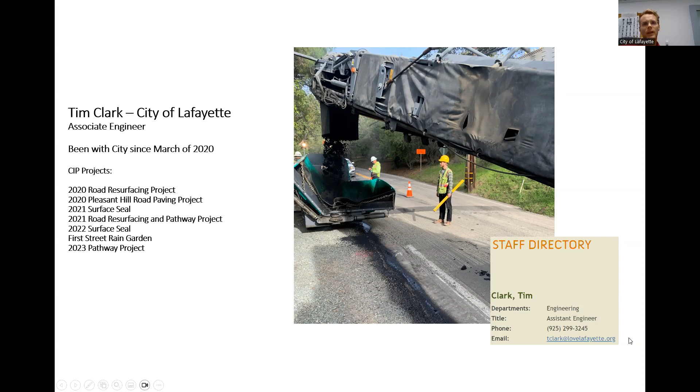And then I'll hand it over to Anna, who's also managing the project. Hello everyone, this is Anna Bernard. I'm the city engineer for the city of Lafayette. I've been here for about almost 2 years now. So my projects that I've done here is the 2023 paving project that repaved Glenside and Olympic Boulevard. And also we got involved in the Lafayette Library and Learning Center, the children's activity deck. It was a remodeling on the deck and the library.

So for the 2024 road repaving project, like I said, 5 streets. Right now we have the 75% draft plans. What we have in these plans is subject to change depending on how the estimate shakes out in the end, and also upon bid opening. If we open the bid and it's over budget, we might need to cut some things. So these aren't set in stone yet, but if you do have any questions or concerns, it's good to bring them up now while everything's still on paper and not when the contractor's in the field. So please feel free to contact Anna or I if you have any questions.

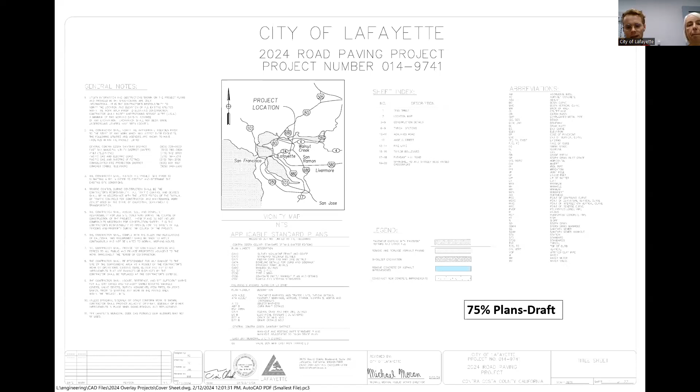So we're going to be overlaying 5 streets, like I said, with about 2.5 inches of asphalt. And before any of that goes down, we need to do prep work for it. So that involves removing striping. Here we erased off this fog line and also this turn arrow right here. So we do this in order to make sure the new layer sticks well to the old layer. If you try and overlay over any paint and stuff, it doesn't stick well.

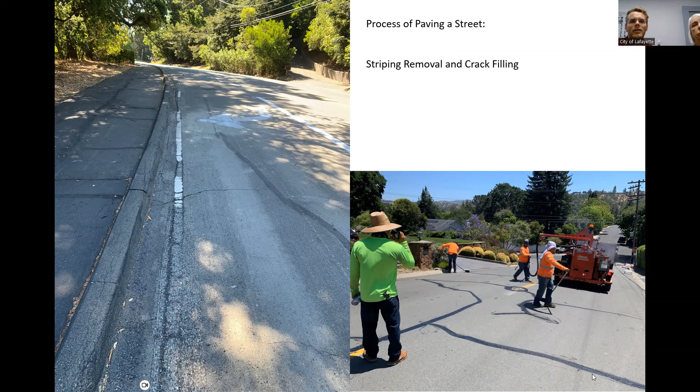Here's the crack sealing guys down in the lower right corner, they're filling in any finer cracks in the pavement. Next up, we have dig out repairs. This is the next step in the process before you overlay. So this gets rid of, you grind out and take out any of those really busted up, loose looking chunks of asphalt. On the left is a grinder, just milling 6 inches down of some pavement, and on the right is where we plugged it up with asphalt.

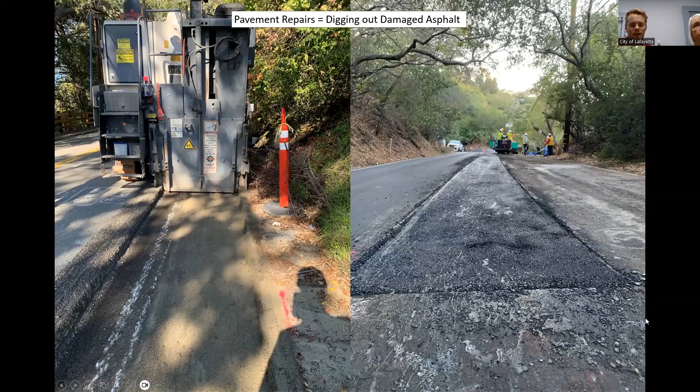And then after that is the overlay process. Before you overlay, you spray down a light coat of oil, something really sticky called a tack coat. Then you can put on the really hot asphalt on top of there. There are 2 methods. One involves dumping a big truck into the paver, and the paver kind of goes. Another uses this pickup machine. It's kind of like an anteater where trucks belly dump in a windrow, and it gets picked up by the pickup machine and fed into this paver back here, and you can kind of keep going all day.

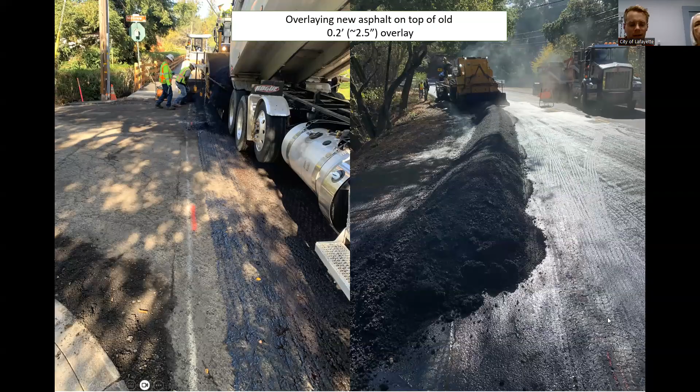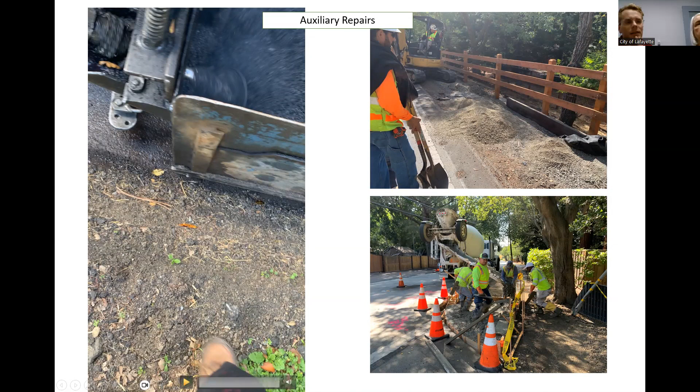So before the paving process, though, there might be some auxiliary repairs that we have to do. On the bottom right, they're fixing up a curb ramp here, bringing that up to ADA standards. On the right, we had to remove and replace a fence. And once the overlay goes down, that new 2.5 inches of asphalt, we can put the berm on top.

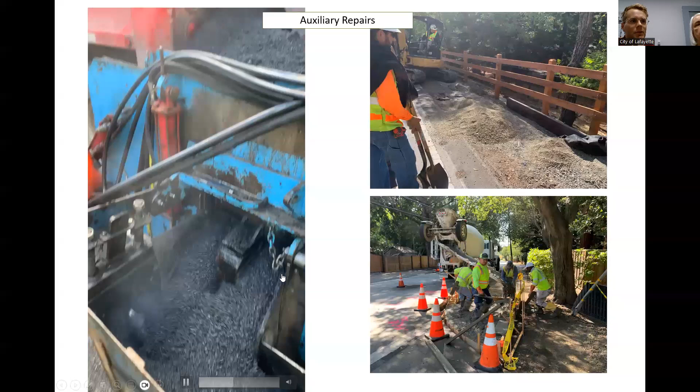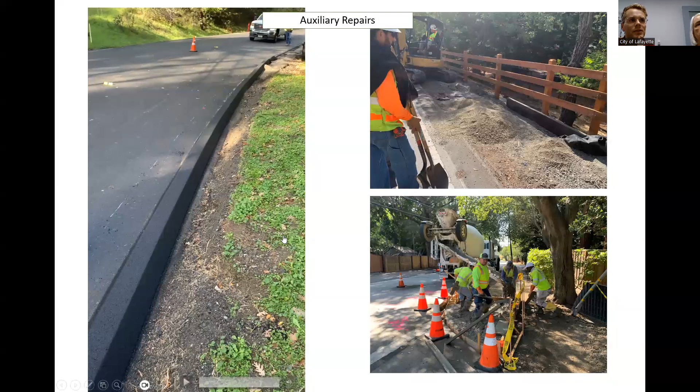You can kind of see the machine taking the asphalt, shaping it, and then squeezing out the new berms. You probably see these on the sides of the roads in Lafayette all the time.

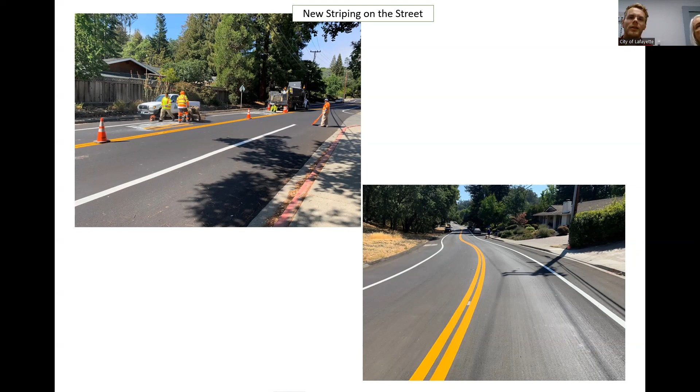After that, it's kind of like punch list items and stuff before the contractor wraps up the project. So you can see all these different steps that need to get done in order for a street to be repaved. It does take a few months in multiple locations to do all this work, so please bear with us during the construction season.

First up on the list is Acalanes Road. We're repaving this from Black Forest Court, where we stopped with the 2020 overlay, and we're going to go paving all the way up the hill to the city limits.

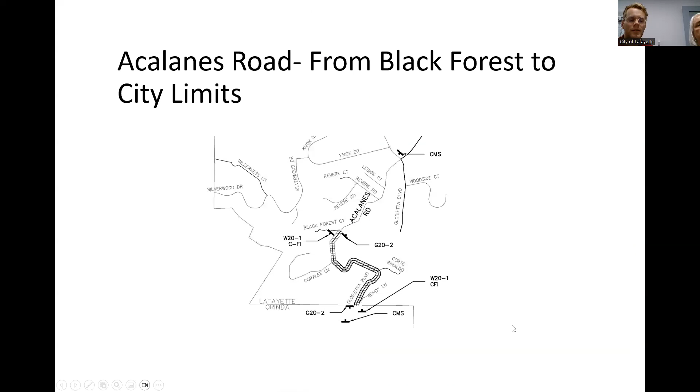The first thing I noticed walking on Acalanes Road was that the pathway on the northbound downhill side of the road was in need of some repair. So we're going to be fixing up this asphalt. Right on the plans now, we have it removing and replacing some of the asphalt behind the guardrail, and we're also going to be fixing up this fence as well.

We're also going to be replacing the guardrail along the pathway and the three other sites on Acalanes Road. This guardrail is not Caltrans compliant right now, so we're going to bring it up to standards. On the right is a picture of the pathway just uphill of that guardrail section on the left.

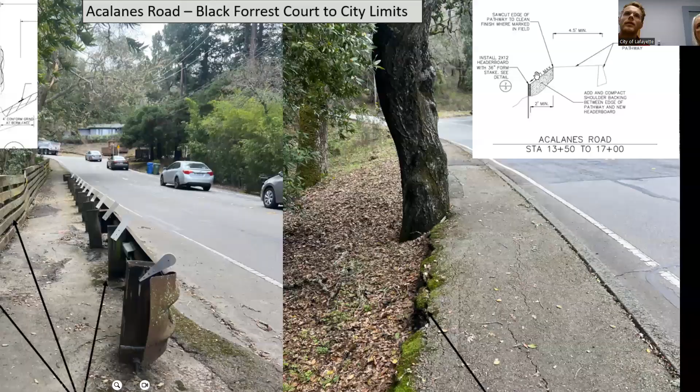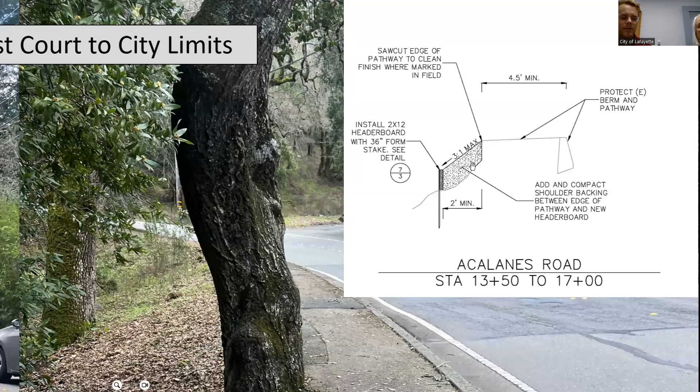If you notice, the edge is kind of flaking off right there. So in order to stabilize the pathway, we're going to put in a 2x12 header board on the left-hand side. There's a little detail page up at the top right, let me zoom in there. We're going to put a header board and shoulder backing between the pathway and the header board to reinforce it, then saw cut the edge of the pathway to a clean, neat finish. So while it's not going to look like a new pathway, it should give it more life.

On the left is some guardrail. This is another section that's going to be removed and replaced and brought up to standards. Right now it's too low. We want the top of it to be 31 inches above the asphalt pavement.

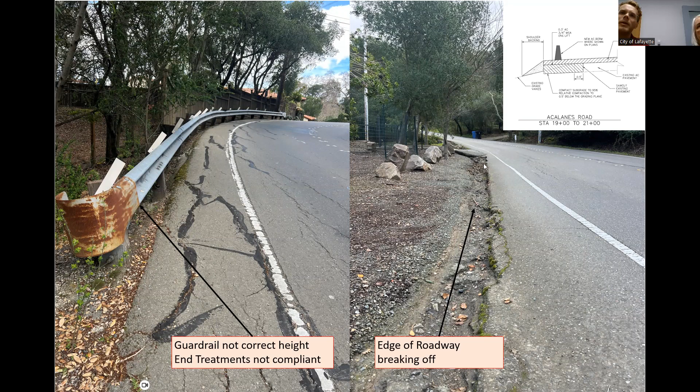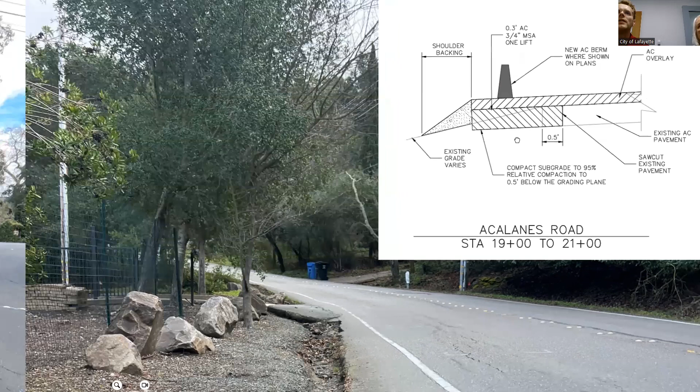On the right is the road widening we're planning on doing. There's a kind of trough developing on the side of the road, which is taking off some of the edge of the roadway. What we want to do is widen out the asphalt section right there. You can see this is about the edge of the existing pavement. We're going to go out around 2 feet wider and put a new berm, that new asphalt curb, on the edge of the roadway to collect any water that accumulates, so it'll stop eroding our edge of road.

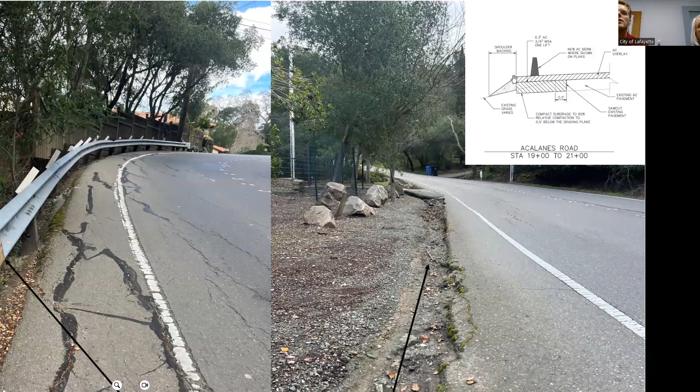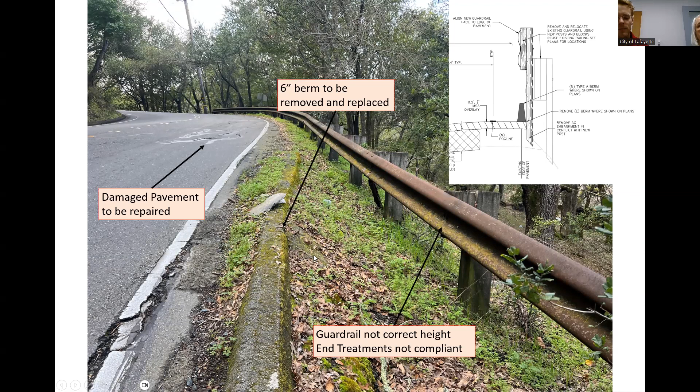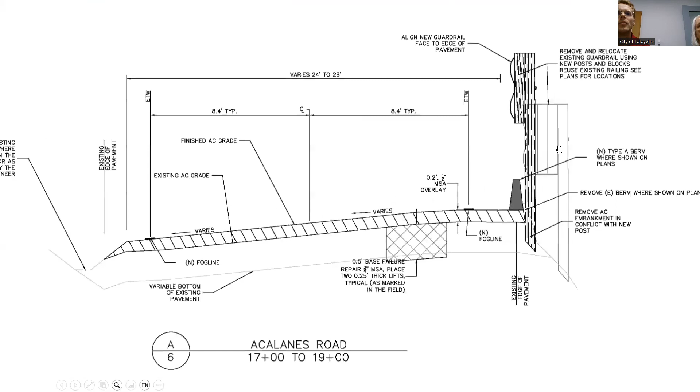So here's a cross section. All these details I kind of showed on the previous slide: some road widening, and what we're going to do with the pathway with the header board right there. Going up here, we're going to move that existing guardrail over to the edge of the pavement. And going down here, if you look on the left side of the page, this is what we're going to do with the pathway. We're going to try and rip out the old fence and put in a new fence, and also put in a new guardrail.

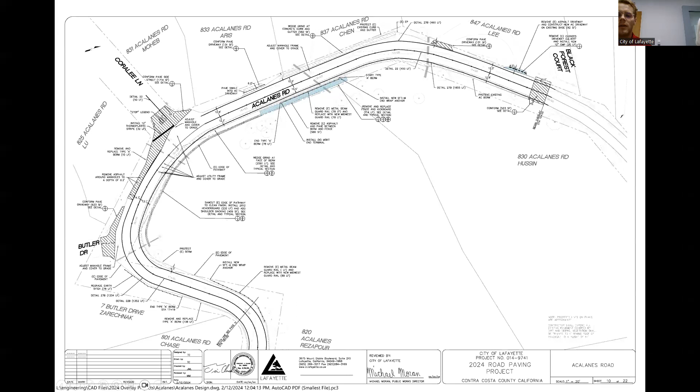So looking at the plan sheet, starting at Black Forest Court, going up the hill, like I said before, we're going to be fixing the pathway. We're going to be removing the fence, putting that back, then stabilizing the edge of the pathway right here.

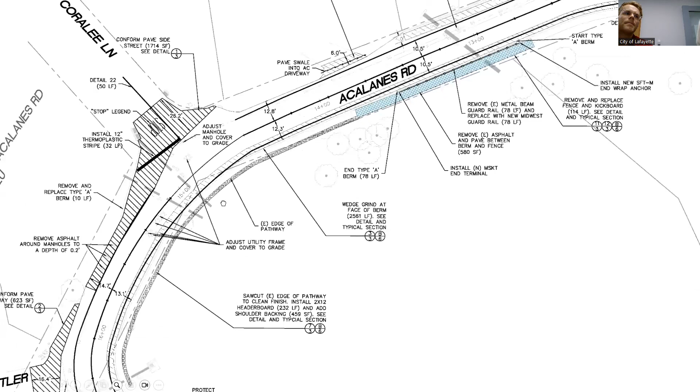Going further up the hill, we're going to be carving out more of a ditch on this curve right here. Right now it's kind of filled in with earth, so we want to make sure water keeps on that side of the road where it's supposed to. We're also going to be replacing this section of guardrail right here near 820 Acalanes.

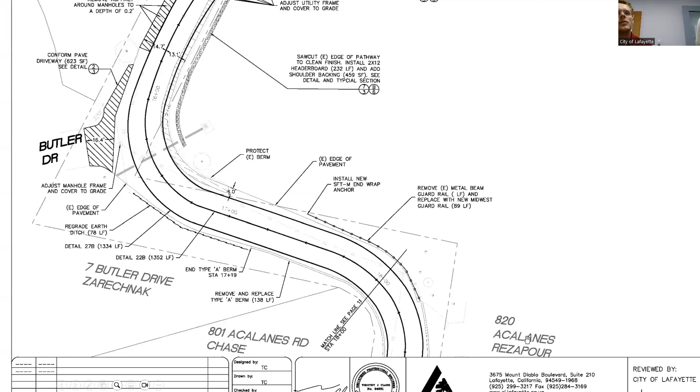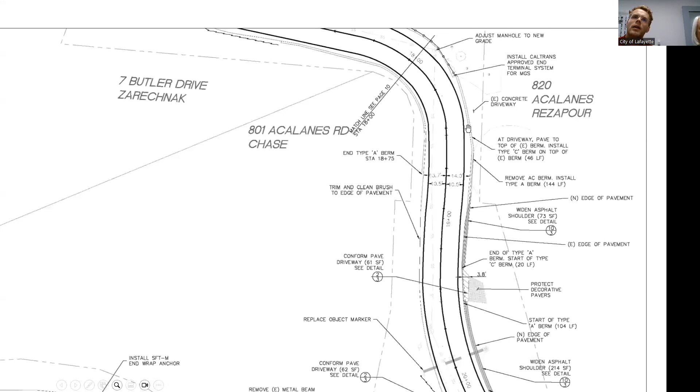Just past 820 Acalanes, we're going to be doing some road widening and putting in a berm all along the side of the road up until the existing guardrail. We're going to be replacing this guardrail. We're also going to be widening the lanes right here, because having too narrow of lanes allows people to cross the line willy-nilly. So we want to give people enough space to make this really sharp turn.

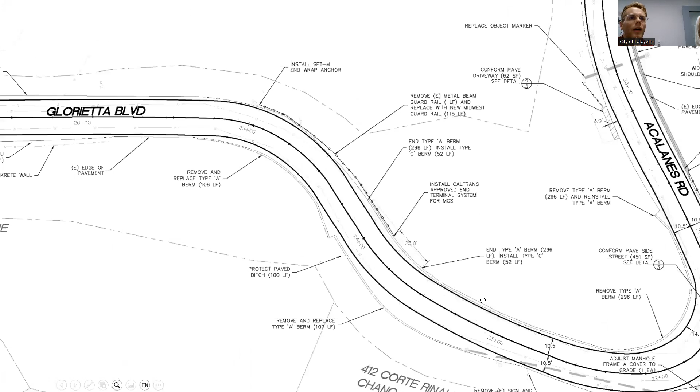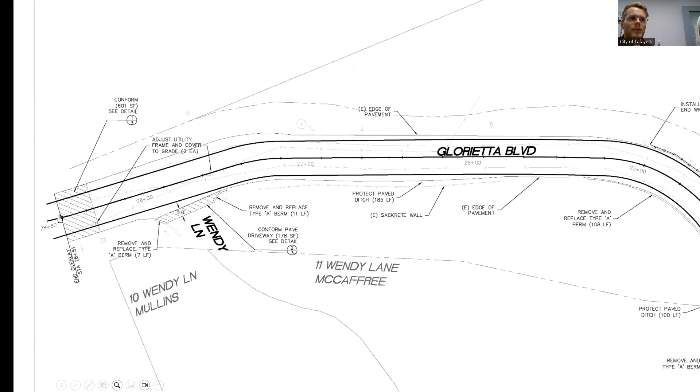Going up the road further, we're going to be replacing this section of guardrail as well, and we're going to be repaving. We're going to put in 2.5 inches of asphalt on all of Acalanes all the way up to the city limits, which is just past Wendy Lane.

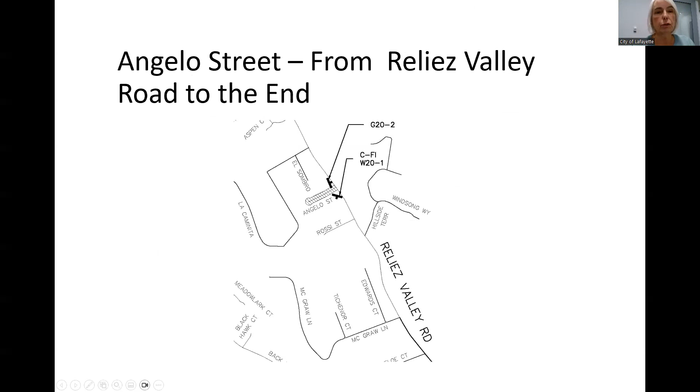All right, now for Angelo Street. Okay, everyone, so Angelo Street, it's a street that's a dead end off of Reliez Valley Road. So we are doing the repaving of the entire street.

When we looked into what kind of treatment we're going to do, we discovered that the existing asphalt pavement was in a stage of deterioration and cracking that needed more than just a dig out and overlay. So the proposed work is to grind and inlay 3 inches of the existing pavement.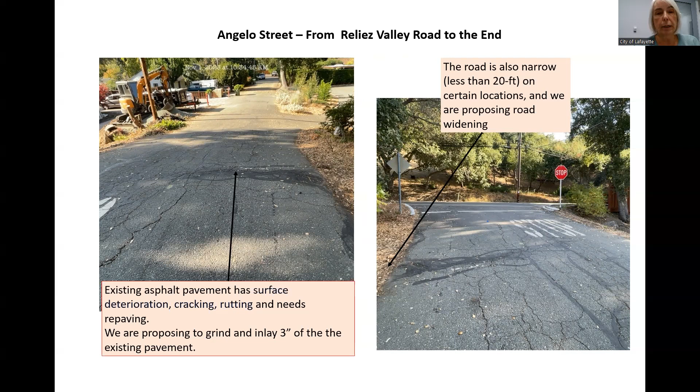Also, we noticed that the street is fairly narrow at the beginning, off of Reliez Valley Road, so we're going to do some road widening in this area here. This is the plan that we're developing, and you have seen the 75% plans.

So we are grinding entirely this area, which goes right now to the existing edge of the pavement. We are widening the road about this area here at the beginning of the road. We're going to widen about 18 inches on this, and that will allow the road to become a 20-foot wide portion.

Once we install the inlay asphalt, we will retouch the stop marking and the crosswalk. Our limits of the work are at the edge of that crosswalk. We are not doing that because this was done recently, so that will be our conform edge there.

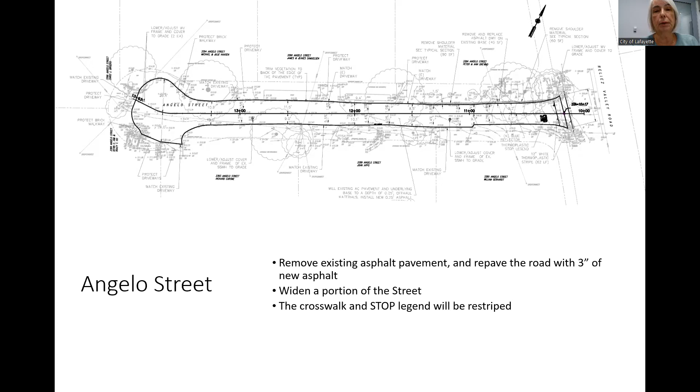So when the grinding machine comes and grinds the street, we protect the edge of the existing driveways. And the inlay is done, probably, I imagine, in one day.

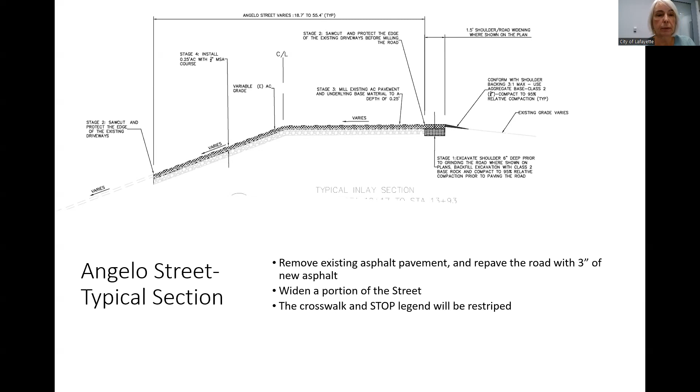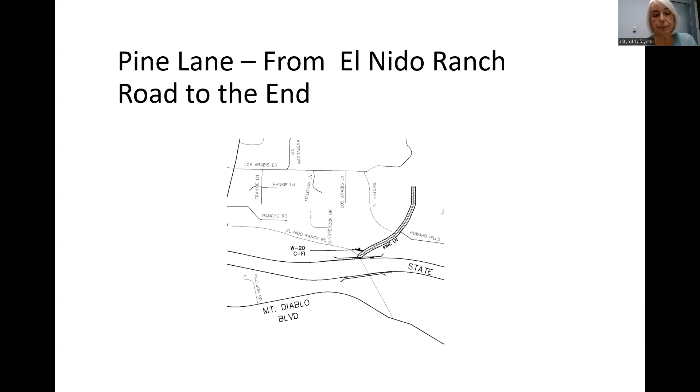So Pine Lane is another street that I've been working on with the team, and the area of repaving goes from El Nido Ranch all the way to its end. On Pine Lane, the asphalt wasn't as bad as Angelo Street.

So we are going to propose to wedge grind the east side of the road, and then install a 2-inch overlay in its entire width, from edge to edge. We also noticed that the El Nido Ranch cross curb ramps didn't comply with the latest ADA requirements.

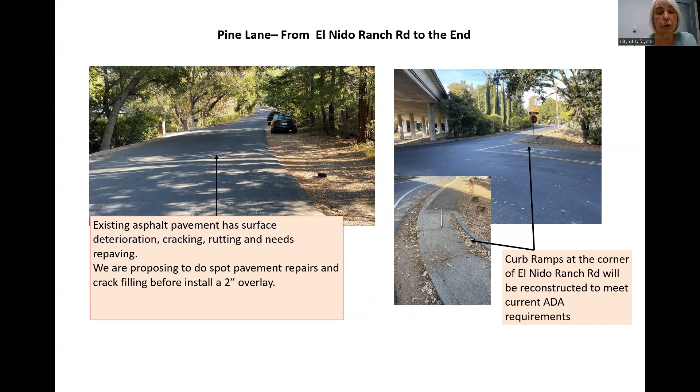So we are going to completely remove and replace this, and bring in new curb ramps that comply with the new standards. By doing the wedge grinding on the east side, we preserve most of the elevations, and the conforms meet all these driveways on the east side.

But when we overlay the rest of the street on the west side, some of the driveways will have to have a portion removed, and then we provide a smooth transition to the existing improvements. Unfortunately, some of these driveways go right against the existing edge.

So we are proposing to take about 2 feet of these ends here, and then do a transition from the final conform elevation to the existing driveway.

We will have a note and requirements for the contractor to do a clean cut on concrete, pavers, or bricks. So in the final product, it will look like the existing improvements go right against the asphalt, a nice clean finish.

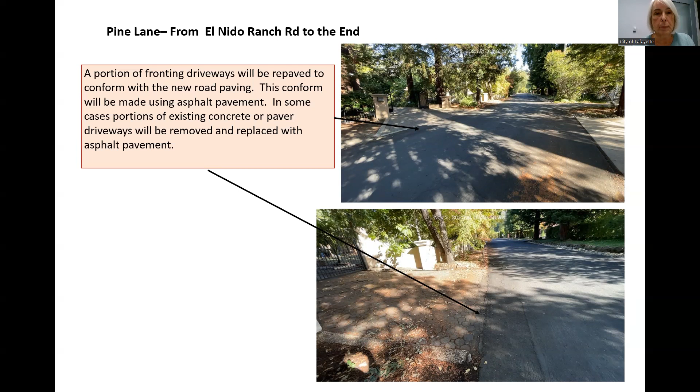Okay, all right, so here's our plan development. When we're talking about wedge grind, we're going to grind the entire end of the road about 8 feet wide, and this goes all the way to the end.

At Timothy Lane, we will have to do a transitional grinding here, shown in this hatch area. So we also have to do some grinding and then conform pavement on Howard Hills Road.

As part of this project, we will also do some of this. The water runs the entire length of the street on the east side, and it goes into a series of existing pipelines, under concrete driveways. But we noticed that in certain locations there is a flattening and sinking of the area alongside the road, which will create some issues. We're asking the contractor to regrade and recreate the ditch along the side of the road.

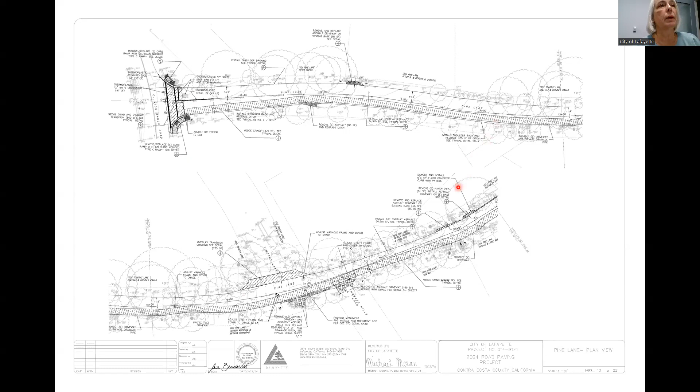In our next slide, we have the continuation of Pine Lane, and you can see some of what I mentioned, improvements that will have to be cut back and then transitioned into the asphalt. So you can see some of these driveways here.

So those have to be put back with asphalt? It has to be put back with asphalt. So if you have a brick driveway, a concrete driveway, or a paver-finished driveway, we will cut a piece of that driveway, and then conform it with asphalt.

At the end of the street, we have 3 driveways that meet in this location. So we decided to do a full grinding here, and then conform with the existing elevations as a finish of the road. So this is some of the new curb ramps that we're proposing.

That's done in the northwest corner of El Nido Ranch, and this is the northeast. This is a curb ramp that we are applying for a permit with Caltrans because it's under the freeway.

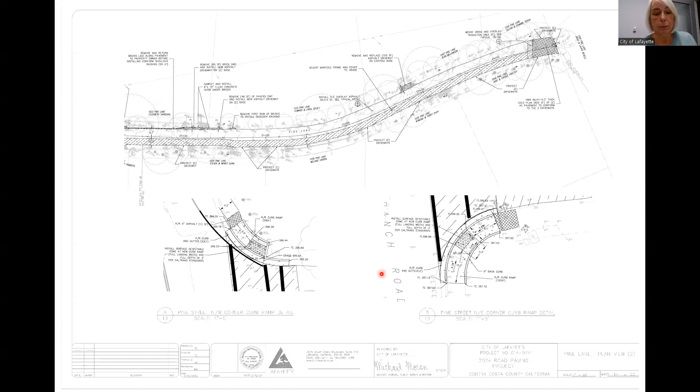We're going to do some big dig outs and take out 6 inches and then put it back in asphalt before we grind with the wedge grind and apply the 2 inch overlay over the entire road.

Also, you'll notice with the wedge grind, the reason we decided to do this is because we would not impact the existing pipelines installed there, and some of the concrete that runs over these pipelines.

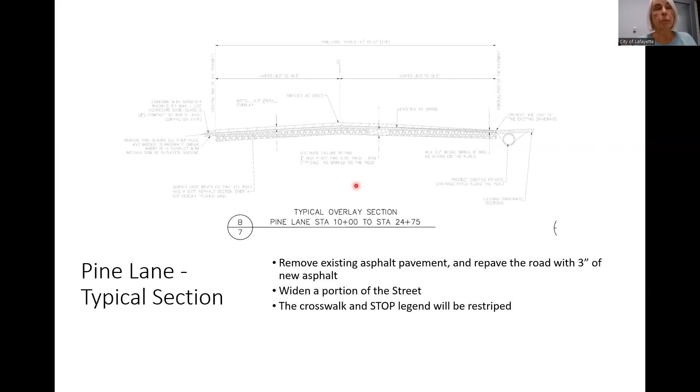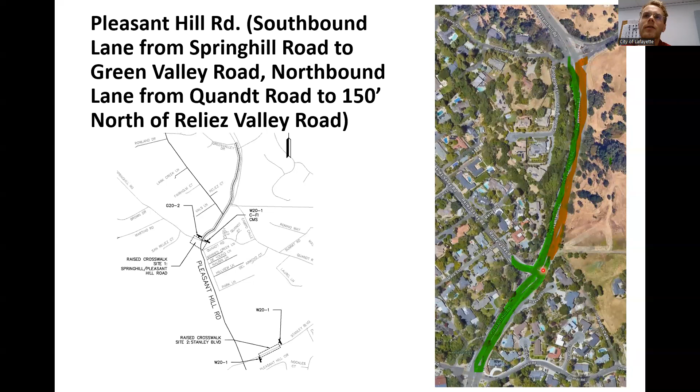And then we're going to keep on paving both sides of Pleasant Hill Road up until Quandt or Springhill. We're not going to pave into this intersection or past it. So this is our paving limits for the Pleasant Hill Road section of the project.

So on one section, this is the Green Valley intersection on Pleasant Hill Road. We have an existing guardrail that we need to raise. Also, from Green Valley down to Reliez Valley Road in the southbound direction, the bike lane there is pretty jacked up. The berm is kind of peeling from the edge of the asphalt, and there are a lot of large cracks.

This is because there's a very steep bank right here, and it's slowly creeping into the creek. So we are going to do extensive dig outs in this area, but we're going to do our best to fix the problem. This is a recurring issue though, because this hillside is slowly slipping.

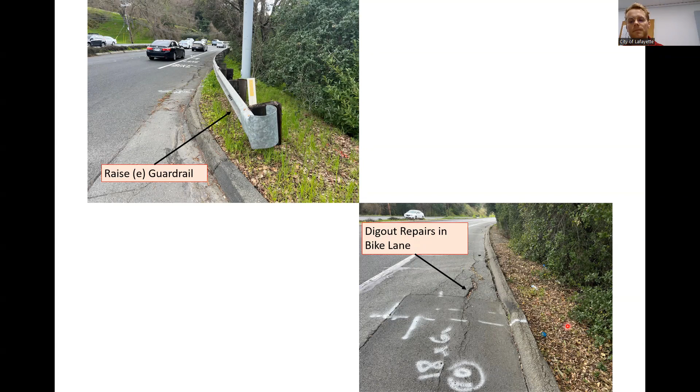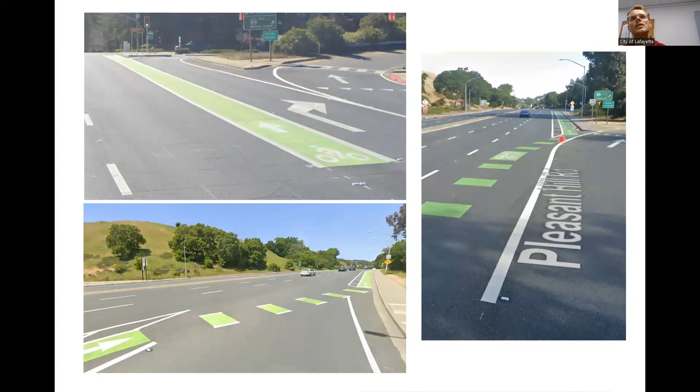We're going to be installing some green bike lane markings on Pleasant Hill Road to make it more visible to cars that this is a bike lane with bikers along the street. This is the southern section from Deer Hill to Mount Diablo Road, which we did a couple years ago. It won't look as extensively green as that, but there will be some green.

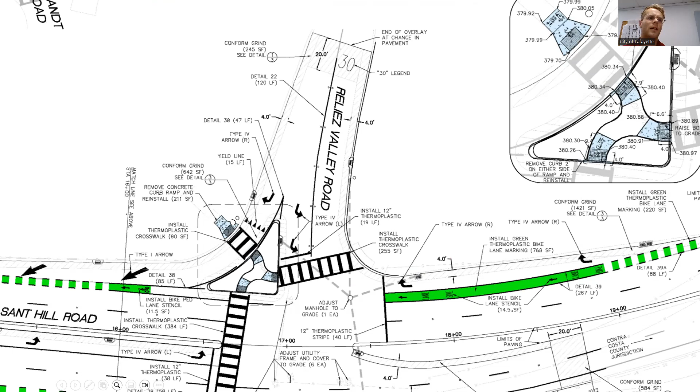Here are the preliminary plans. We're still deciding how we want to stripe the bike lanes, but starting at the Spring Hill Road intersection, we're going to put in a green bike lane all along there, going all the way to Reliez Valley Road. We're also trying to make these ramps ADA compliant. So far the plans have us removing the concrete and readjusting the ramps, but if we can glue down domes instead, we could do that to make them ADA compliant.

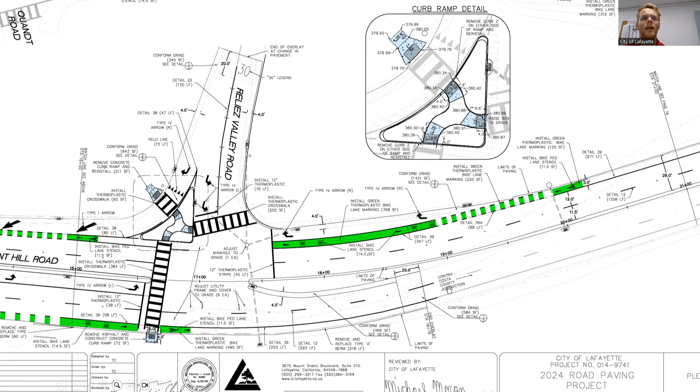We're also replacing one on the south section of the roadway. Going further up the hill, the northbound lane is Contra Costa County, so we're not going to repave past this line. In the southbound lane going further up the hill, though, we are going to be repaving that section, with more bike lane coloring shown here.

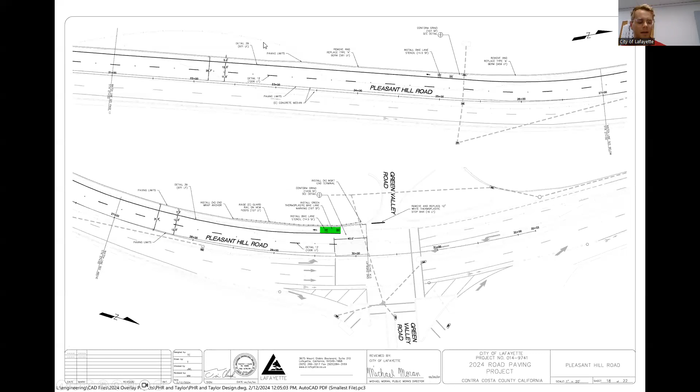We're also going to be removing the existing berm - that was that berm machine video I showed you before - and putting it back. Nothing much to it going up the hill, just removing the existing one and putting it back in better condition.

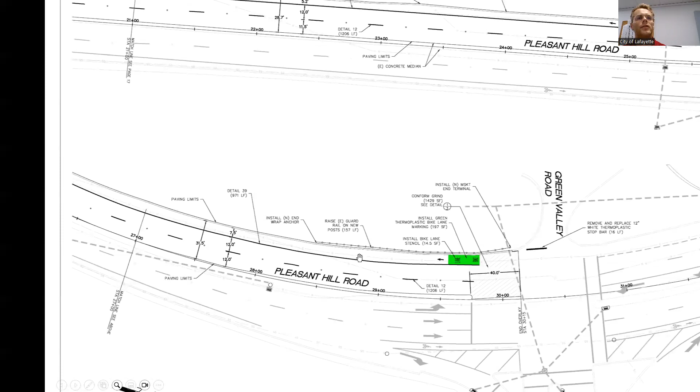And this is that guardrail section we're going to remove and replace.

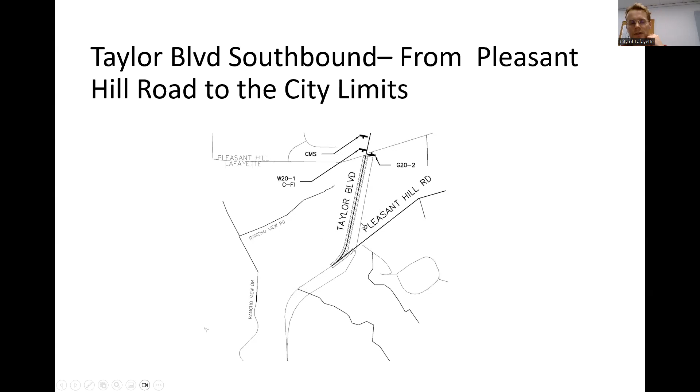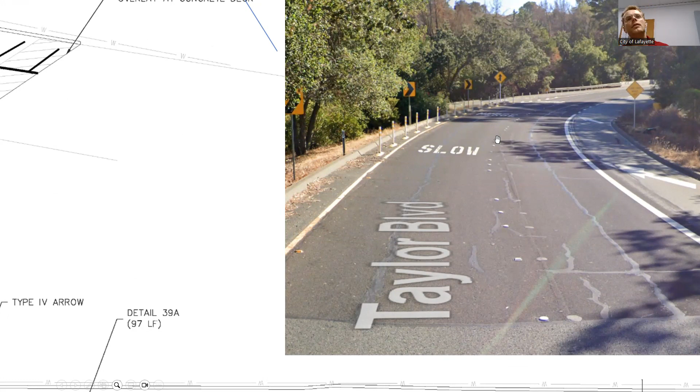After Pleasant Hill Road, we're also doing Taylor Boulevard. For a resident, you won't see much change. We're going to overlay this with 2.5 inches of asphalt like the other streets, but we will be changing the striping. Right now this is the existing curve as you're headed up the hill on Taylor Boulevard. If you notice in the middle, there's these big Botts' dots, reflectors, serving as a center line. You go over these and it feels like you hit a rumble strip.

We're going to be painting that back with thermoplastic paint. These are being phased out by Caltrans, so we're going to do the new standard, meaning there will be more paint on the road down there.

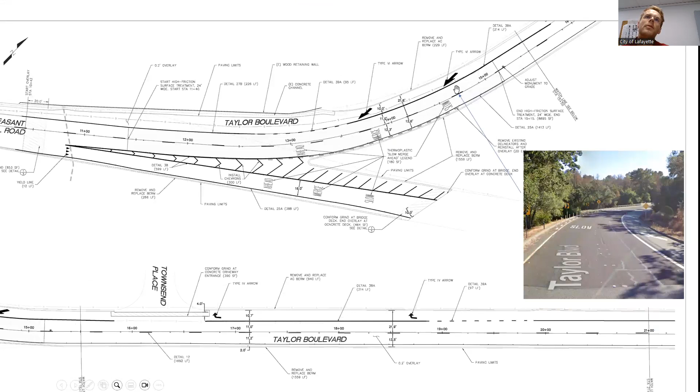Also, since we're overlaying the street, we're going to be removing this high friction surface right here - you can see the transition from regular asphalt to this darker material. This high friction surface gives cars more grip as they're going around the turn. We're going to be putting that back as well.

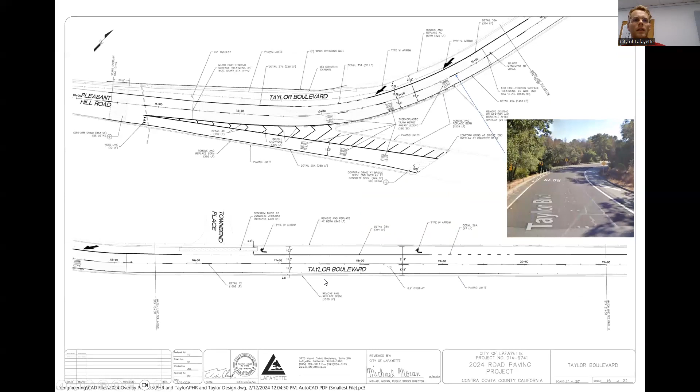Going on to the next slide, this is another section of Taylor Boulevard. We're going to pave all the way to the end of our right of way, the end of the city of Lafayette, so that will feel like a new street.

Going on to another section of our project is the raised crosswalks. This project has been approved since 2022, and we finally managed to finish the design. We're putting it together with this bid, which includes installing two raised crosswalks for safety near the schools.

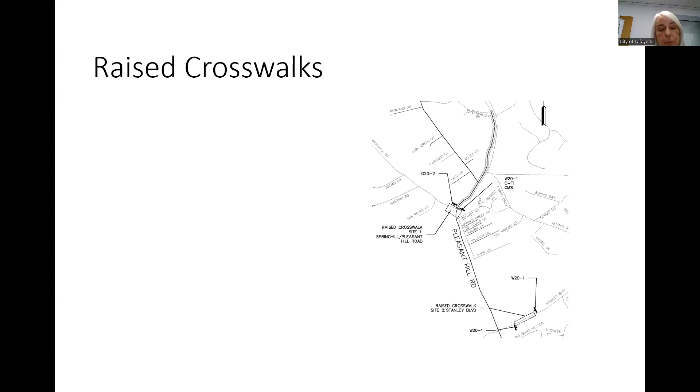The first one is a raised crosswalk at the intersection of Spring Hill Road and Pleasant Hill. There's a median that separates the lane that goes across Pleasant Hill and the right turn lane, where cars coming out of Spring Hill make that right turn. The existing crosswalk configuration is on a diagonal line, so cars making that right turn don't have very good visibility of people crossing the street here.

So the proposal is to reconfigure the crossing area to bring it closer to the corners, giving better visibility for vehicles making a right turn. We're also narrowing the road, since it's really wide and cars tend to speed here - once narrowed, we'll create this raised crosswalk.

So there is an effect of slowing down, because it acts almost like a speed bump with a crosswalk. Also, we're creating medians to actually reduce the width of the road. So there are drainage improvements that we will have to do with this raised crosswalk.

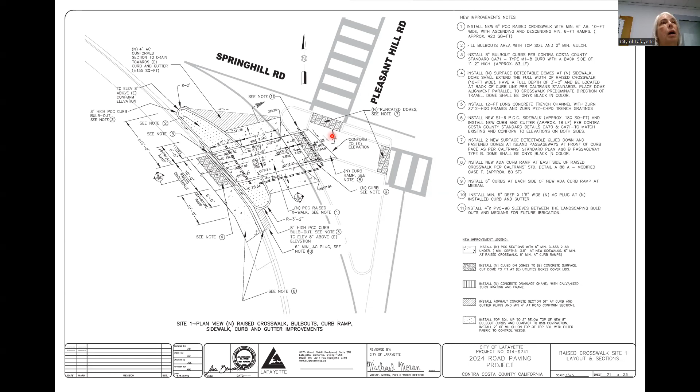So this is how it will look, the striping after the raised crosswalk is built. You can see it's a lot of thermoplastic high visibility crosswalk, and we created those shark teeth, which bring a setback of where the car should stop when they see and yield to pedestrians crossing.

There will be signage also alerting drivers of the raised crosswalk ahead, and also for vehicles to yield to pedestrians.

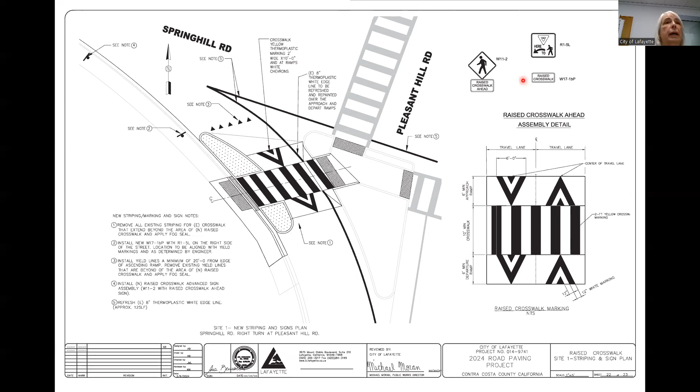The other raised crosswalk that we will be installing with this project is on Stanley Boulevard, right in front of Acalanes High School. This is a crosswalk where students walking toward the high school are using the sidewalk on the south side.

They tended to cross here into the middle, an unsafe route. So the decision was made to create not only a safe point with raised crosswalks, but also an ADA compliant path for students to reach the school.

With this raised crosswalk at this location, we will have to do some drainage improvements so the upstream water doesn't get dammed by the raised crosswalk. So we're installing a new DI inlet here.

Also, we're going to have to regrade and repave the entrance of 3229 Stanley Boulevard, so we create an ADA path that is reachable to the raised crosswalk.

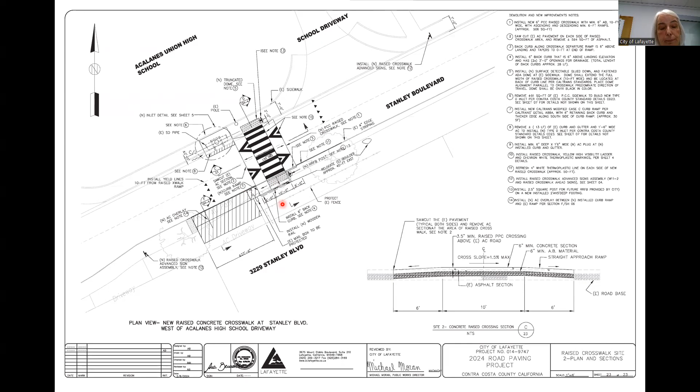So we're talking about some of the working schedules. For Acalanes Road, Pine Lane, and Angela Street, which have less traffic, we have proposed all this work be done during summer hours. The contractor will be allowed to work in the area from 9 a.m. to 5 p.m.

Pleasant Hill Road and Taylor Boulevard, which are major arterials with heavy traffic, during the summer hours we allow construction to take place from 9 a.m. to 4 p.m.

But in case some of the improvements extend into the school year, then we will reduce the hours from 9 to 2 p.m. to avoid major times for drop-off and pickup at the schools.

The raised crosswalks and the right turn lane at Springhill Road into South Pleasant Hill Road will be closed for a week. We will see the possibility of allowing trucks to make a right turn from Springhill into Pleasant Hill Road, but it's possible we will have to detour trucks while still allowing only vehicles.